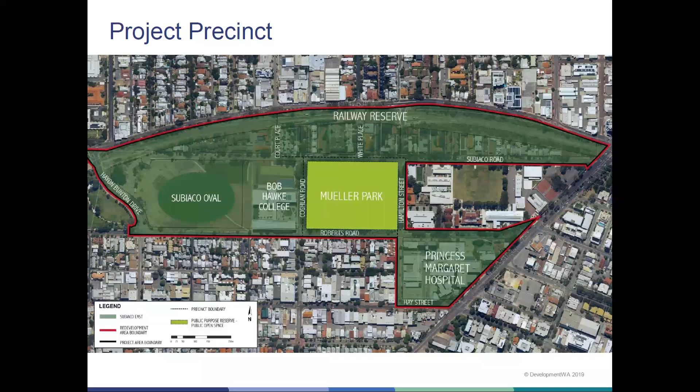The key components we are tasked with responsibility for is to demolish the stadium around Subiaco Oval - clearly that part has been completed - as well as buildings at Princess Margaret Hospital, to undertake the planning process to facilitate the development of these key pieces of land, and then to undertake all the works associated with that. The target densities for these two sites set a minimum of 2,000 dwellings, which will be delivered over probably a significant period of time into the future.

And we're also required to reinstate Subiaco Oval, which to a large extent has now been completed, with the exception of the landscaping works adjacent. So our current focus is obtaining community feedback to inform the final master plan, and we have our team here to talk to you tonight. Following that, we will then be continuing to gain approval for the plan, undertake all the civil works and the roads and services in order to develop the area, complete all the marketing and all the landscaping and the public areas, and then we'll be releasing lots to the market over a series of years into the future to unlock private built form development. So again, thank you very much for joining us tonight, and I'll hand back to Viv and our other presenters. Thank you.

Thank you, Dean. We're now going to hear from Patrick Smith, the Senior Development Manager from DevelopmentWA, who's going to provide you with a bit of an overview of the project. So over to you, Patrick.

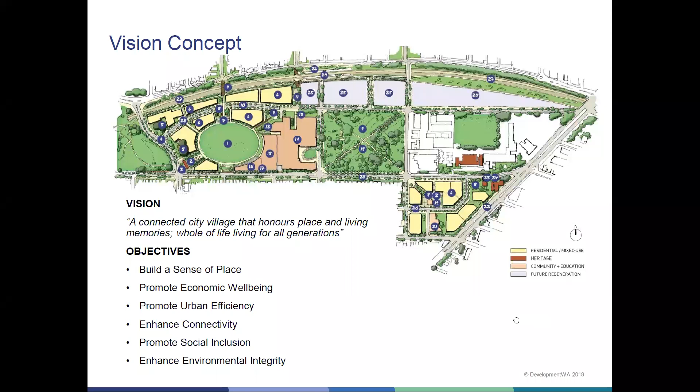So when we start any project, we look at the opportunities and the givens or the agreed positions for such a project. Now, as with the vision and the objectives, this master plan process offers a number of opportunities to us. Firstly, the master plan can actually improve on the vision concept. And that's really just because we have additional information and further feedback from the community on that. We also have the opportunity to look closer at public spaces, how they interface with buildings, and how their heritage is represented on site. And we have already made provision for the multi-use recreational facility and also facilities for the WA Football Commission sites on those.

So a number of agreed positions or the givens that we are working with is we do need to provide a variety of open space for all the future residents. So all the way from children through to the elderly. And we have density targets for this development, which have already been mentioned. Now, we do know that the Oval will be retained at Mueller Park, and we also need to make sure that the school integrates with this development for us as well.

So, in terms of the master plan, what is the master plan? So, the purpose of a master plan is to create a graphical plan, and that's supported by a number of different bits of information that gives some high-level direction for the area. It also sets out the vision for the future of the area and provides guidance on the layout, the design and building form of the area.

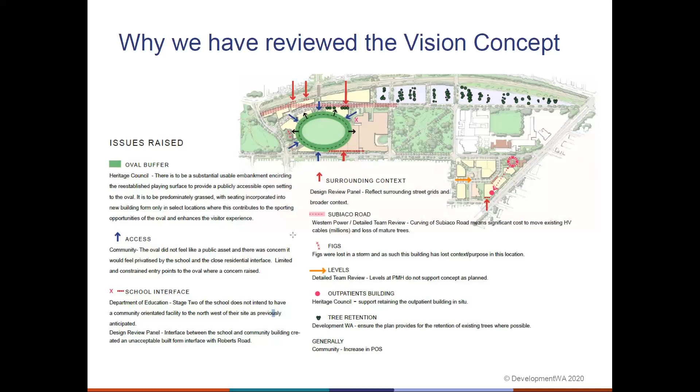Lastly, we've had a lot of comments from the community about open space and keeping and providing more of it. We looked at the plan that the city and community have both strongly supported, the Kitchener Common Master Plan, approved around 2017. The key standout of this plan is that it has 4 rectangular sports fields in addition to the oval to become public space.

We looked at this plan early on, and to be quite honest it would have been much easier to just use it — it would have saved us a lot of time and money. But this plan presents some challenges that have only become known since we've done further work. This information wasn't available at the time the plan was considered.

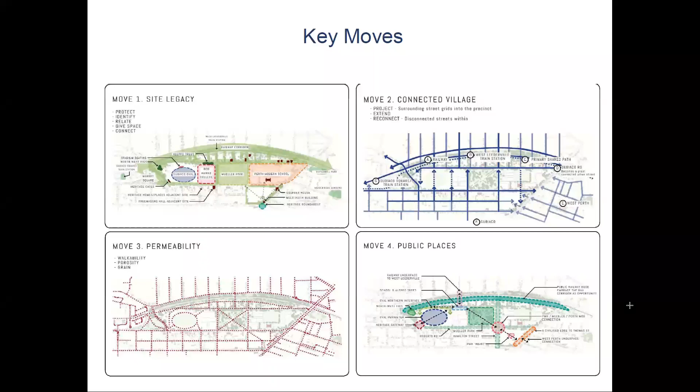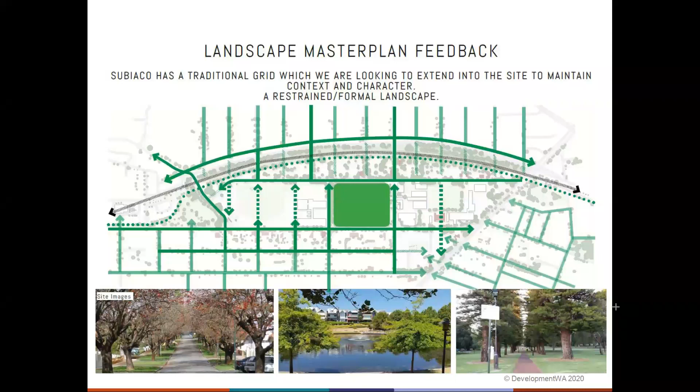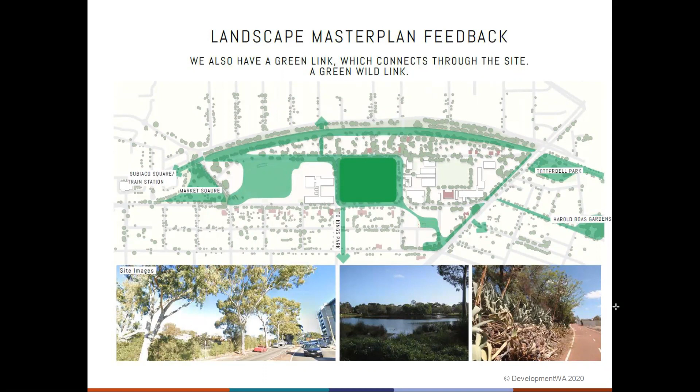It's been really important for us to consider the context in which the site is based. It's quite a traditional grid, and that reflects those sort of formal, restrained English landscapes that we see around Subiaco. Mueller Park is a really perfect example of this. But what's been really important to us throughout the entire process, and something that we've heard from the community, is this opportunity for a green link or a bidi trail, as Barbara just talked about, to link the site together and be something that is a little bit wild and starts to do a lot of things with it around sustainability, interpretation and public use. So we've really been looking at how that green link can connect the two sites and then further out into the surrounding context.

So tonight we're going to talk a little bit about some of the green spaces and the built form and how the master plan is coming together. All of these spaces have been guided by memories, technology, movement networks, a whole bunch of things that we've heard from you, that we've heard from all the stakeholders and all the background research that we've done. So you'll start to see these threads pulling through the approaches we're talking about tonight.

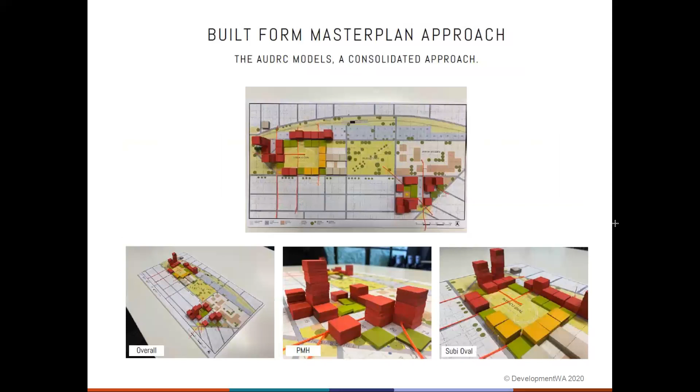Shannon, did you want to touch on the master plan built form approach for us? Yeah, so as part of working with the community reference group, we had the opportunity to look at that spatial framework - elements like where does density go, the appropriate location of green spaces, community space and urban plazas, but also how we're thinking about the connection between neighbourhoods and also to the surrounding neighbourhoods. So what you're seeing is the model that we provided to those members. While we have been working in parallel, testing the technical constraints and opportunities, it was really good to see those preferences for the spatial alignments coming together. This is where we started to see that breathing space around the oval and where at those key nodal areas to apply the density - where it sort of stepped back away from the oval edge, but also then looking at the PMH site where there is more opportunity to internalise that building height and also create breathing space in the middle there for that public amenity. So this has been a really good exercise in parallel working with those teams.

Thanks, Shannon. So we have been looking at the site as a whole, as a master plan space, but it is pretty clear that there's going to be a few neighbourhoods. Specifically, there's going to be that rail neighbourhood, but probably the ones that we're going to focus on tonight are the Oval neighbourhood and PMH. So we'll start on PMH as a site.

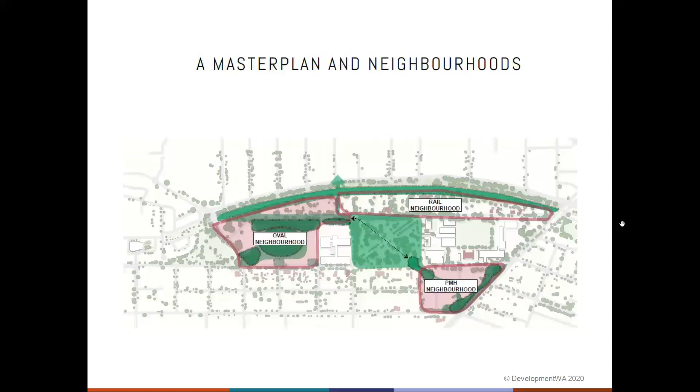We've got the outpatients building to the southeast of the site. As Patrick touched on before, we're looking to leave it in its current location. It's been there a very long time, and our advice is that that's the preferred location from a heritage perspective. So we're thinking about how we can provide some context to that, given it will be amongst some pretty tall buildings and a different context to what it is now. The hospital does have high buildings in it.

We're looking at that northern corridor to connect it through to some of the heritage buildings in the school, and a green link along Thomas Street that helps connect it to Godfrey House. On that green link, we're looking at how we can make sure that Mueller Park and that diagonal access through Mueller Park connects into the site. We have that real big central public park. And we're looking at a green buffer along Thomas Street to provide a little bit of breathing space to the development and get us off that really busy road.

Working closely with the road networks to ensure that we've got access as required to service the lots. Looking at the underpass, making that as safe as possible and a preferred access point onto the site.

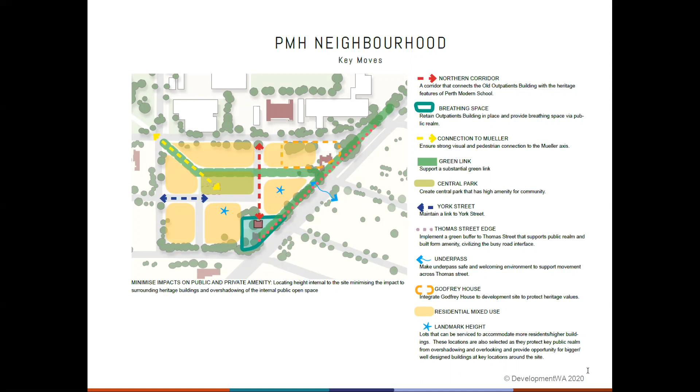So the central POS contains at the moment the stack, which you might all be aware of. That's the really big building with the big chimney in the middle, which was used to generate power for the hospital. There is the opportunity for us to retain that. When we look at the levels on site, we'll have to consider exposing the underground parts of it, which have some really cool infrastructure that would make for an interesting site.

What this approach really needs is a use for that building and an idea behind it. So what we're talking about at the moment is how we can activate that space and make it functional for the community.

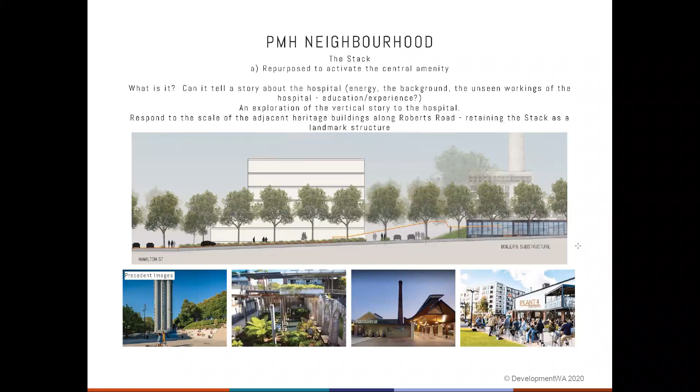And the stack offers some opportunities, but it also offers a bit of a spatial constraint. So we're working through that as a team at the moment, and we've had lots of input from the CRG on this as well.

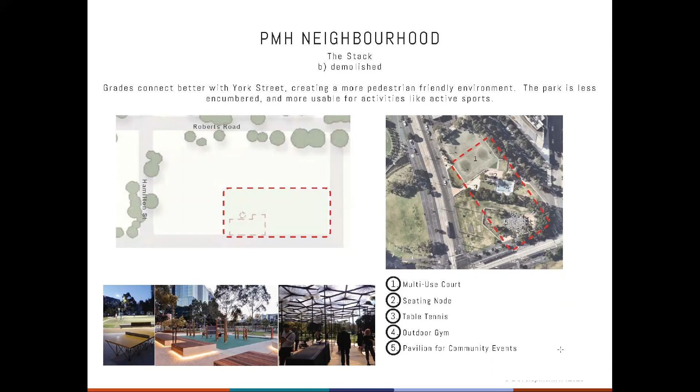On that central park, just looking at what the potential uses for that could be, we've talked a lot about the interpretation opportunities for it to be a space about children to celebrate the history of PMH, potentially through referencing some of the hospital uses. There was this great space called the Megazone within the hospital, which had some really brilliant colours and was a really happy space. But it's also going to be a community space.

It's the centre of the PMH development, so we see that a lot of residents will be utilising the space daily. There's opportunity to put in the markers that Barb talked about as well, and connect that site through to Mueller Park and then on to the Subi Oval area.

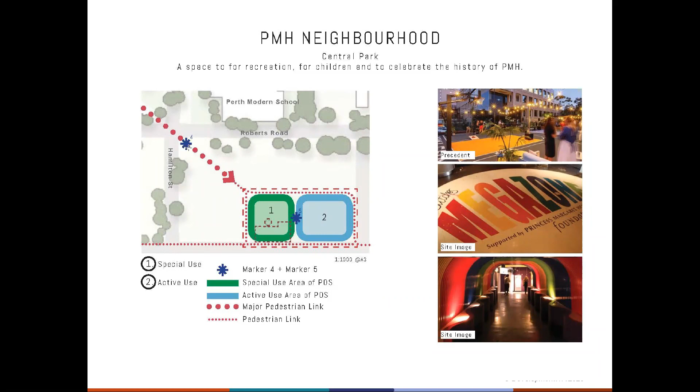And then the other green space within PMH is the Thomas Street green space. So that's looking at an edge along Thomas Street, as I said, to give the development some breathing space. We are looking at really opening up that underpass and making it a safe and comfortable environment, and investigating opportunities for interpretation, specifically around the outpatients building, where we could potentially have another marker. But it also gives us the space to provide a little bit of a quiet area, which might be a place of reflection. There's also some important landscaping and garden memorials through there that we'd like to retain and explore into the future.

So certainly talking to a lot of the PMH alumni about this space and how we could interpret some of those memories.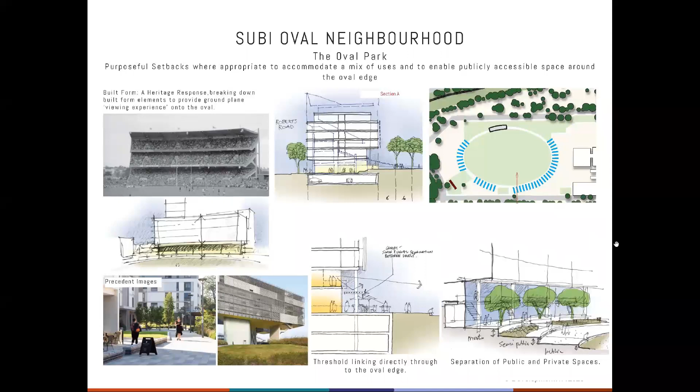So obviously with the previous approaches that have been put forward, both the Kitchener and the business case, there was discussion around the opportunity to relocate the figs. Figs are pretty hardy species in regards to relocating them. It's something we've done around Perth, and in other states it's quite common. But we really want to interrogate that opportunity and make a decision based on what's best for the figs, the public and the project.

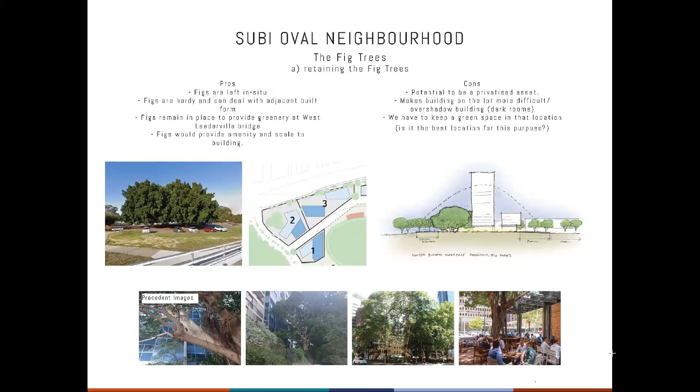Potentially this becomes a bit of a privatised asset, so that's something we're considering. These are such a beautiful community asset, important for the community realm, and we'd like to explore how they could potentially be used more publicly. The other option is that they could potentially be relocated, all of them or some of them. On the next slide we show some opportunities around relocating the figs to more of a central park or public space, where potentially they can be used for shelter and become more part of the public realm. We've spoken to the CRG about this, we're getting a lot of feedback, and it's really factoring into our decision making around finalising some of those lots into the future.

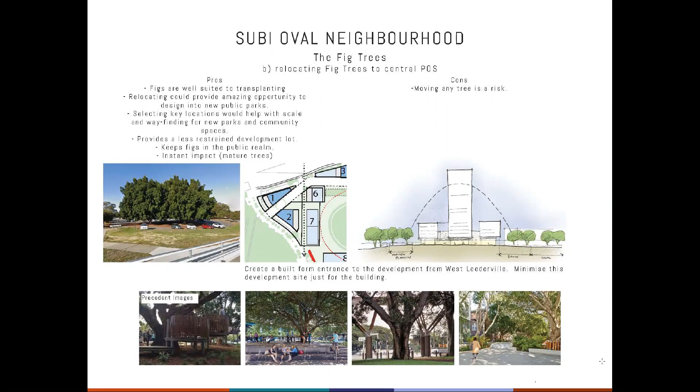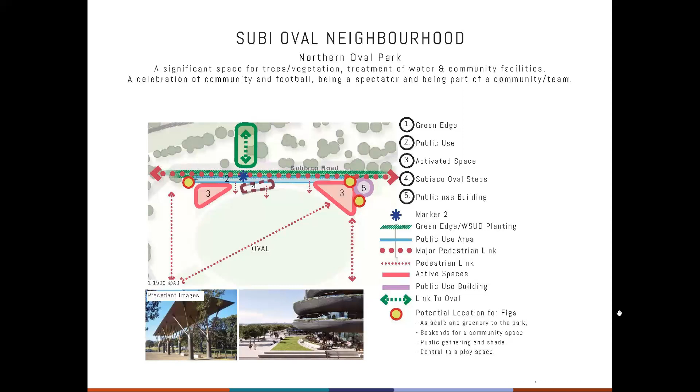Our last park around the area is that 20-metre buffer that Patrick mentioned, to the north of Bob Hawke College. Obviously it's a great space to have that green link connect through. You've got the Aleppo pines there, and we're looking at how we can really reinforce that underpass to the north through to West Leederville.

That northern track through to the lakes is really important based on some of the comments that Barb had mentioned earlier as well. So it will be both interpretive and a huge pedestrian link. That connection to the train station is really important, so this site will have that real strong north-south, east-west connection.

And where we've got that blue spot, we've got quite a large area to look at something of an intergenerational community space that has a strong relationship with the school.